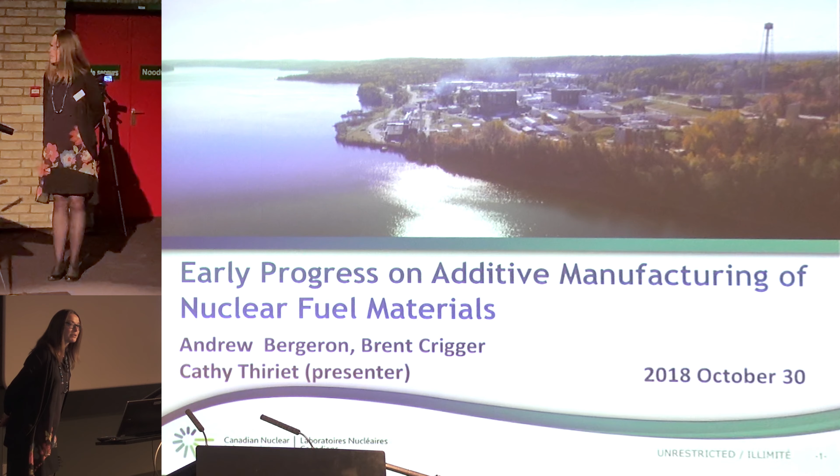And the second reason I was very keen to attend this conference is that I'm also involved in the development of our capability in Chalk River for studying molten salt thermophysical properties. So, but let's talk about additive manufacturing, which is a bit a different topic than what we have heard so far, as I will speak about thorium in solid form.

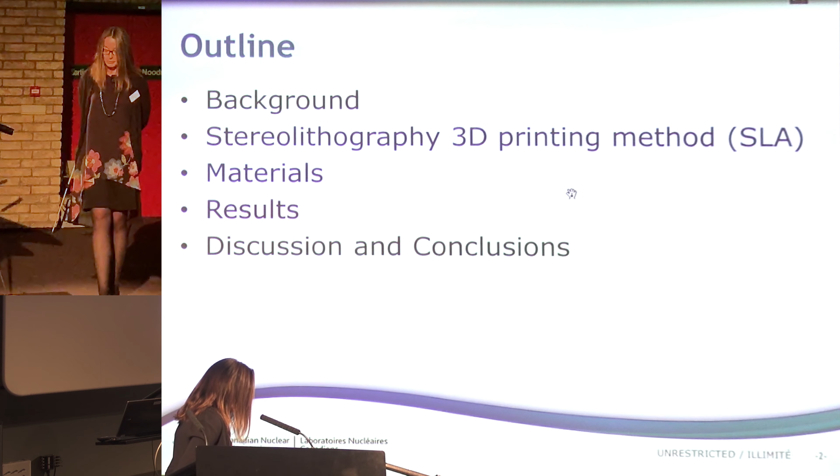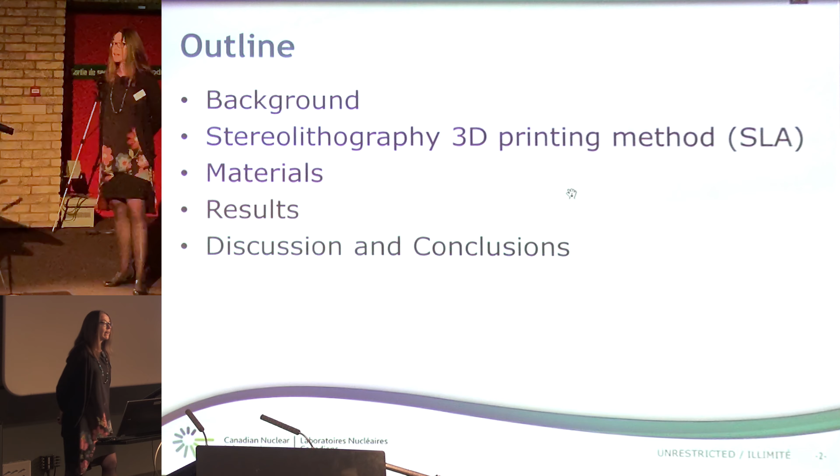I will give you a bit of background of the reason why we started this work in the Canadian Nuclear Labs. I will give you a bit more information on the concept of the 3D printing method we use, which is called stereolithography. I will describe the material used for this study, provide you some results, discuss, and conclusion.

As you may know, some advanced nuclear fuel concepts are being developed for better fuel performance, to improve proliferation resistance, or fuel security as I should say maybe, increase safety and accident tolerance. You may have heard about those programs talking about accident tolerance fuel. And some of those advanced nuclear fuels may be considered as recycled or are recyclable.

Fuel design may be based on advanced materials, on inhomogeneous structure, or have some complex geometries. Many of them cannot be fabricated via conventional processes applied to more traditional nuclear ceramic fuel. This is the reason why we started this investigation in CNL on additive manufacturing of thoria fuel using a commercially available stereolithography-based 3D printer with photopolymer resin.

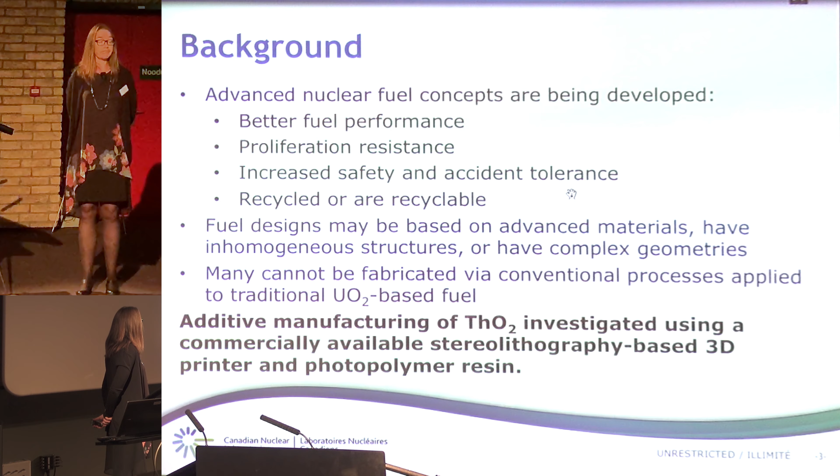Why we initially wanted to start 3D printing nuclear fuel based on thoria is because thoria has similar optical properties to other ceramic materials which have been printed so far using this 3D printing method.

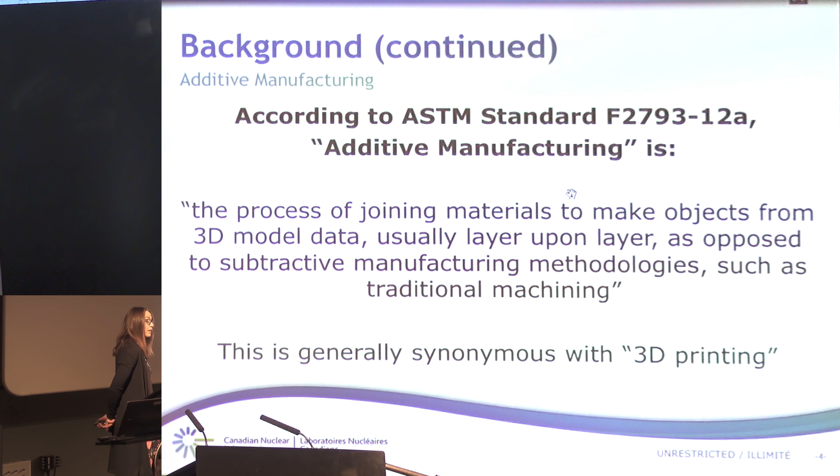So, a bit of definition. What do we call additive manufacturing, commonly known as 3D printing? Well, it sounds a bit more professional to say additive manufacturing, so this is what we use in our world. So according to the ASTM standard, additive manufacturing is the process of joining materials to make objects from 3D model data, usually layer upon layer, as opposed to the more traditional subtractive manufacturing technology like machining.

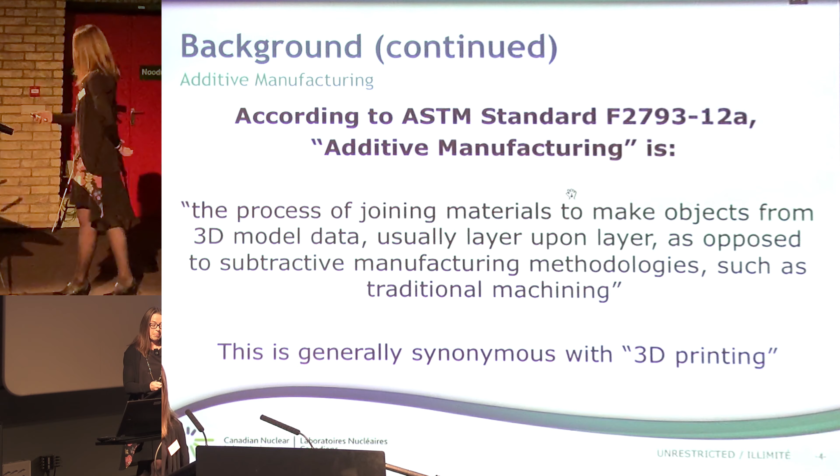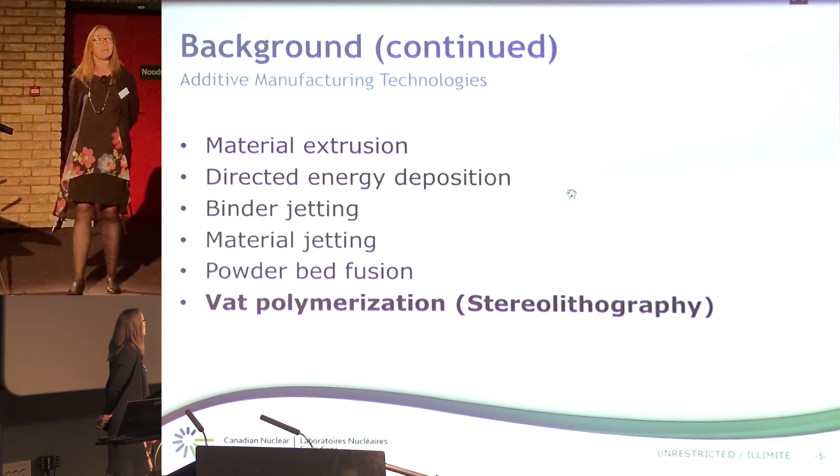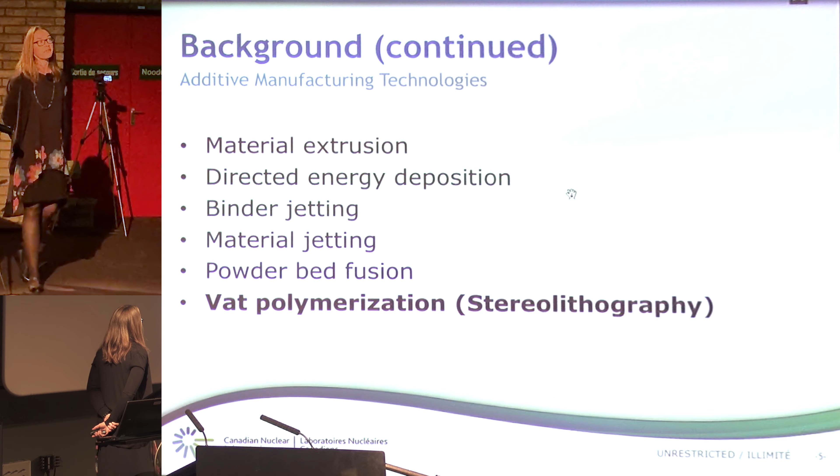There are many technologies using additive manufacturing out there. You may be familiar with some of them, or maybe not. The most common one is called material extrusion. But for this study, we actually use vat polymerization, under which stereolithography falls.

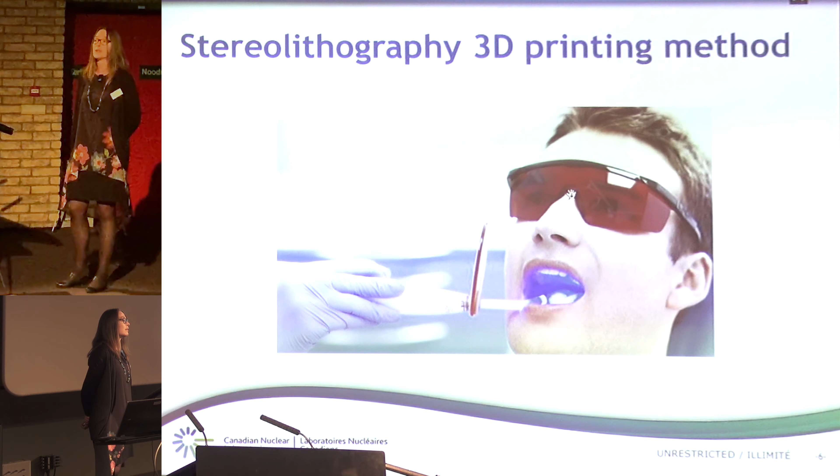If you have had some dental work and, unfortunately, sat on this chair like the guy here, you may actually have experienced what stereolithography is. Because the dentist here is actually using some UV light to cure some materials which have been put in a cavity, for example, to make some bonding between your tooth and the material filling your tooth.

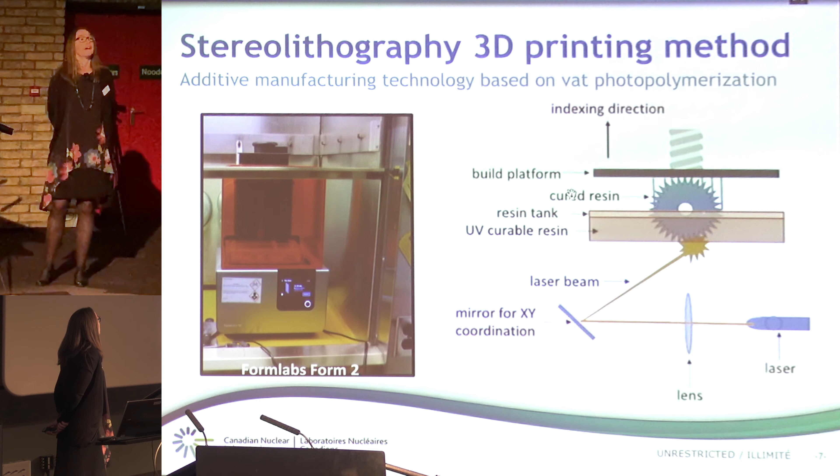More seriously, these slides provide the principle behind stereolithography. So stereolithography actually uses a UV laser, which selectively cures or polymerizes photosensitive resin. This sketch here shows you the principle of this process. So a build platform is lowered in the bottom of this tank filled with UV curable resin. And in our case, we change the formulation of this resin by loading some solid powder, thoria powder.

So we lower this build platform right at the bottom of this tank, where a UV laser traces the design of the first layer of the object to be printed through a window at the bottom of this tank. So the first layer adheres to the build platform, and successive layers adhere to the previous one to slowly build the object to be printed as the build platform indexes in the vertical direction in our case.

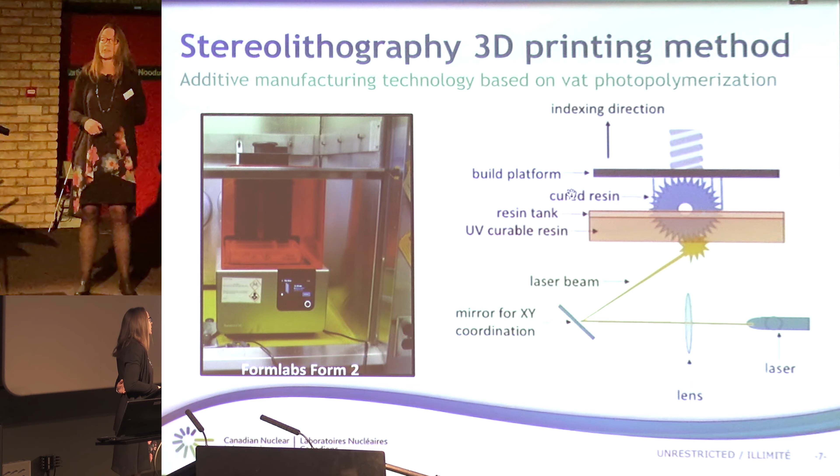On your left-hand side, this is the printer we used in the lab. It's from the company Formlabs, and it's a model Form 2. And we placed this printer, obviously, in a fume hood because we were using thoria.

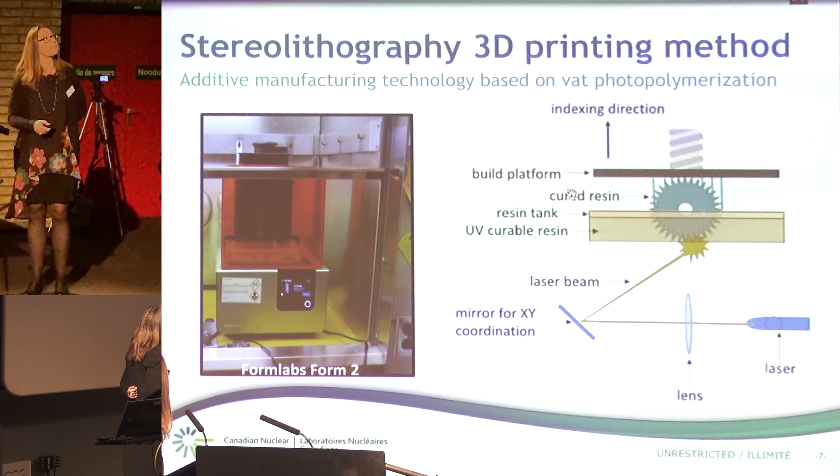In our case, we actually decided to print a little cube like this made of thoria. Why we chose this geometry is because obviously it looks quite easy to measure any geometric dimension and compare with our 3D model. And also, obviously, it can't be made by any traditional manufacturing techniques. We also have to print a base with some structural support in order to be able to print this part here. So this model is defined during the first step of this process.

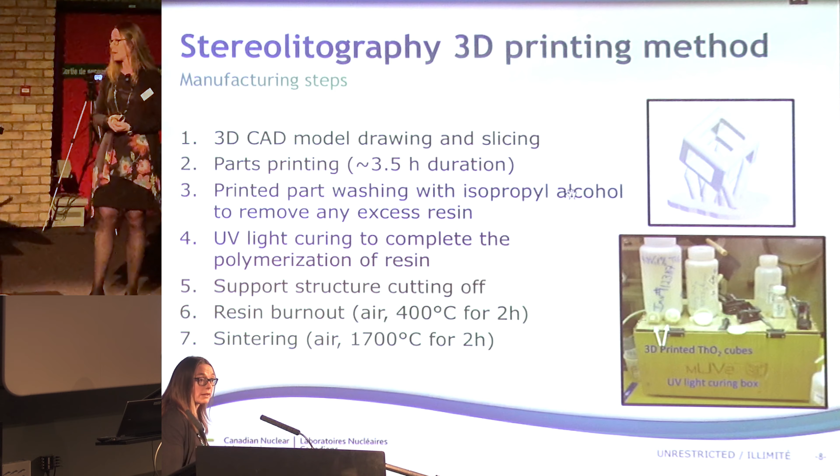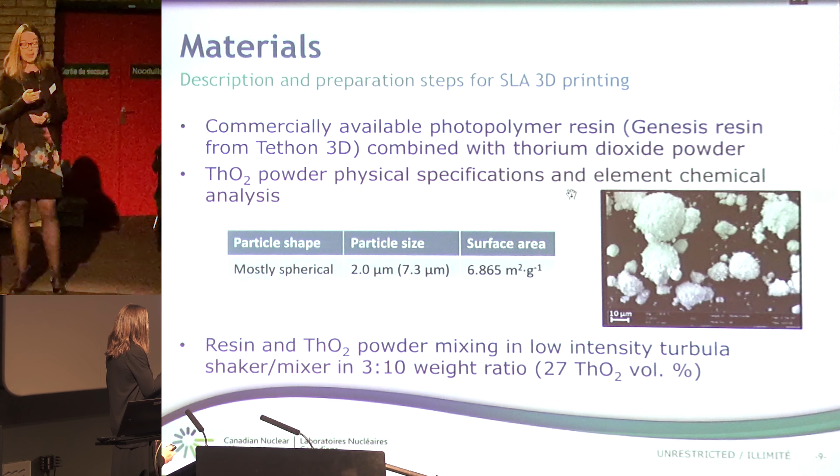So we actually mixed those two components for 4 or 6 hours, I believe it was. And I just want to mention here, talking about the resin, that the main component of the resin is carbon, because it's a hydrocarbon liquid, and it contains some tin and phosphor, which is used in the photoinitiator and catalyzer. And this is important to mention for later.

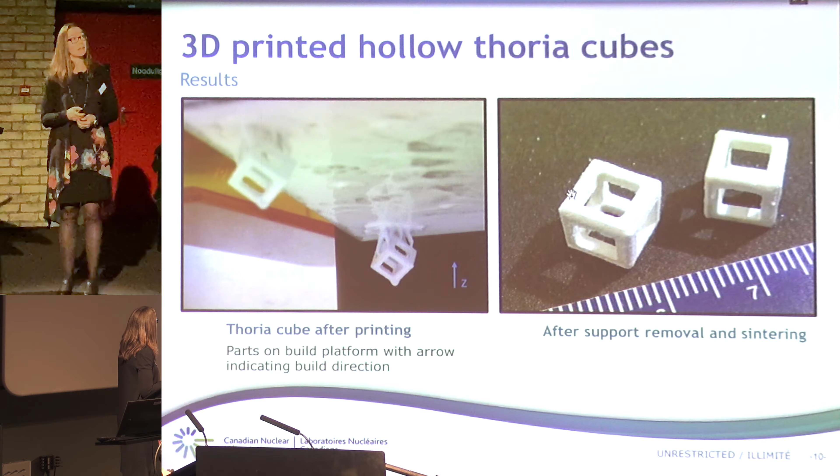And as you can see, before sintering, the dimensions of the cubes are slightly larger than the dimensions of the 3D model, with a maximum measured deviation of about 3%. We observe that after sintering, there is quite large shrinkage, and we actually also observe slight distortion during the sintering step. This linear shrinkage depends on the direction we are looking at, but it's about 18 to 23%, which is the order of magnitude of shrinkage observed when we do UO2 pellets, for example. So that was kind of expected.

You may have seen in the photograph shown in the previous slides that the surface finish of the final parts is a bit rough, about 10 times higher than the accepted surface finish for CANDU fuel. But my understanding is that those measurements would be acceptable for a light water reactor surface finish. Anyway, the surface finish also depends on the orientation of the measuring path in relation to the build line of the cube.

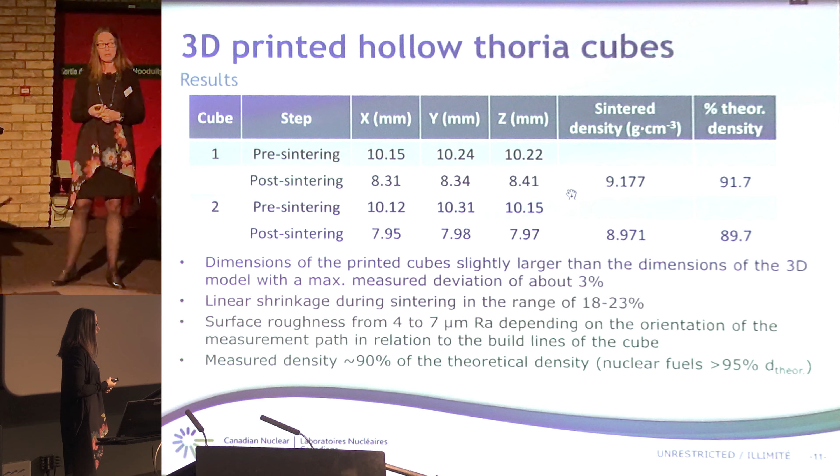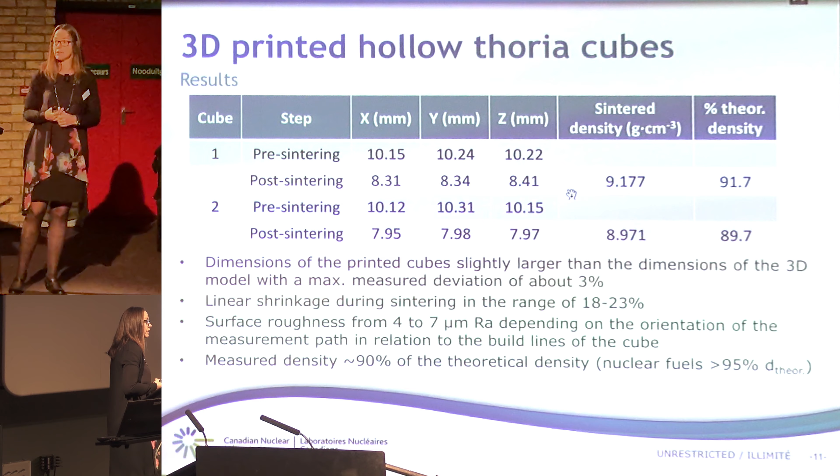Obviously, when we add layer upon layer, there is some anisotropy in the process too. We were pleased, after our very first trials, to observe that the final parts were quite dense, with a value of about 90% of the theoretical density, which is still a bit low compared to the requirement for any nuclear fuel, which is over 95% of the theoretical density. But we are currently working on improving the density, and this density was measured by immersion.

When we wanted to know a bit more about the microstructure of the final parts, we examined those cubes after slicing along one of the faces, after having put those parts in epoxy resin and polished them. We did a composite cross-sectional image of the 3D printed cube face using software to stitch the different images. What we observe is that there is an apparent layer structure of the cube, especially around here, and we can observe cracks in parallel and normal directions compared to the build lines.

What was found in the literature on ceramics using this technique is that some remaining monomer resin in the bulk of the part could still be unpolymerized, not reached by the UV laser. During the last two steps of the process, when we heat those parts at high temperature, the remaining monomer resin can polymerize, inducing some strain in the object and leading to cracking. So it was not a surprise to observe those cracks.

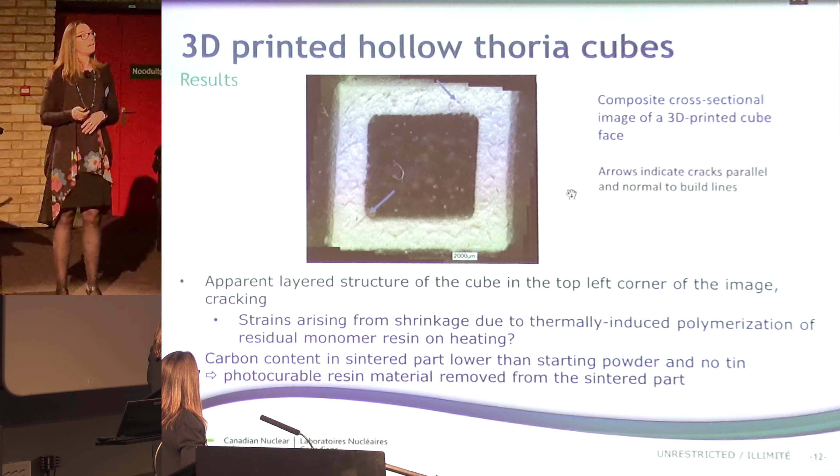So in conclusion, I hope I showed you that we were successfully able to use additive manufacturing to produce thoria parts with complex geometries using a commercially available stereolithography-based 3D printer and photopolymer resin. To the best of my knowledge, it's the first time that has been done. I have heard that Oak Ridge National Lab is working on 3D printing urania, but no results have been published in the open literature yet.

But as you noticed, there is some improvement to be made. Those tests were the proof of concept that this type of manufacturing could be done. But we need to increase the sintered density of the printed parts. We also need to decrease the surface roughness, which is possible by adjusting the layer thickness during the printing process, and adjusting some laser parameters, like energy deposited and power used.

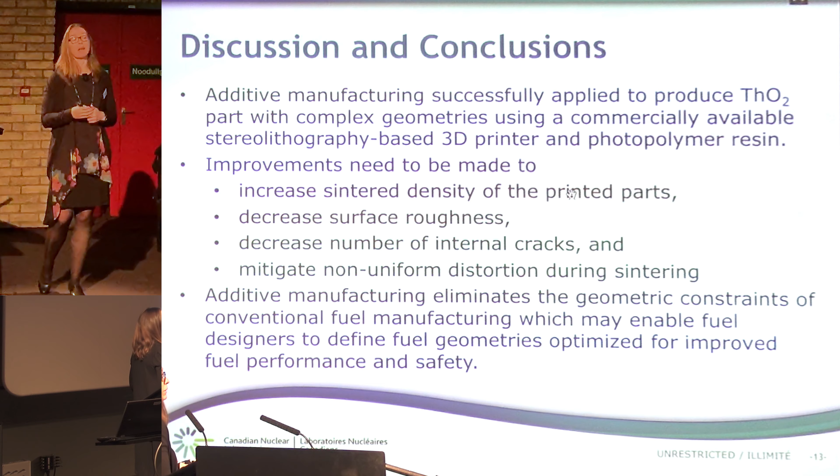So this innovative manufacturing technology allows us to eliminate geometry constraints and gives fuel designers a tool to optimize their fuel concepts for improving fuel performance and safety. And we think that it has good potential application in the future for being creative about what we want to put in a reactor.

Oh yes. I listed here a few recent publications which may be relevant for you. We did quite a bit of work on thoria and also thorium-uranium mixed oxide.

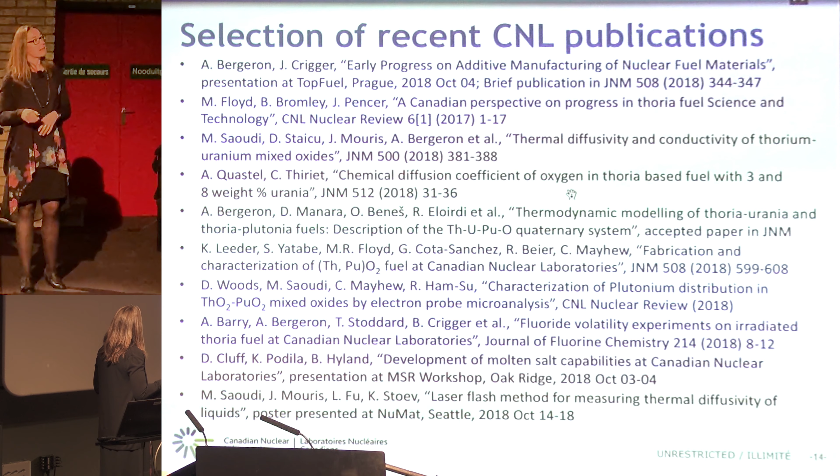Oops, sorry. Yeah, those papers here. Obviously, it's still in solid form because we are not quite there yet on the molten salt area, except that my colleague Dan presented our status on the development of molten salt capability at Canadian Nuclear Laboratories. He gave this talk at the molten salt reactor workshop 3 weeks ago. So maybe some of you may have heard this presentation.

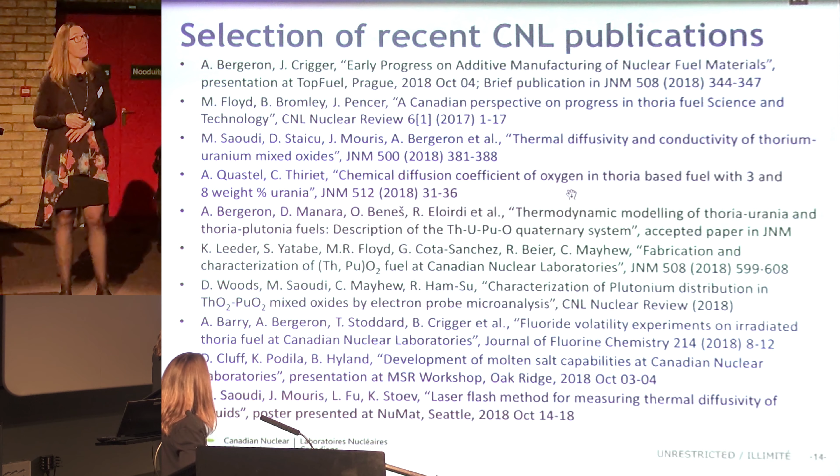And I wanted to mention to you that my colleague, Muna Saoudi, also prepared a poster at NUMAT 2 weeks ago, reporting some results on a measurement of thermal diffusivity on liquid, which is more relevant for you. And I have all those publications in PDF form, so you are welcome to come to me, and I will send that by email.